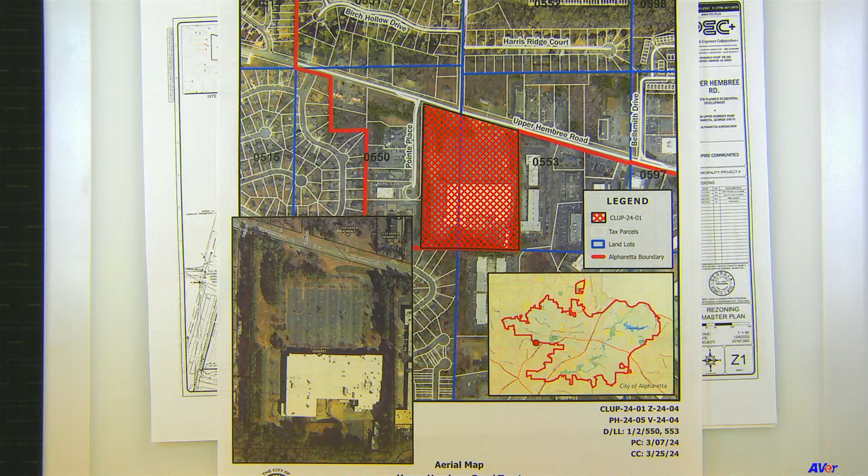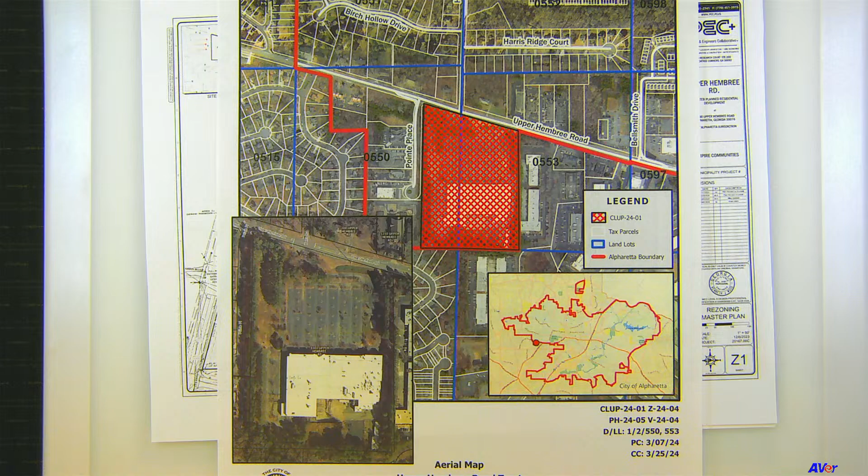Thank you, Chairman and Commissioners. The item before you is a request from Empire Communities. They're requesting a comprehensive land use plan amendment, rezoning and variance to allow for the construction of 149 single-family detached homes on 19.32 acres. The comprehensive land use plan amendment is from commercial to high-density residential, and the rezoning is from PSC, Planned Shopping Center, to R8AD, which is dwelling for sale, attached and detached residential. Variances are requested to reduce undisturbed buffers, to reduce lot width, and to increase building and lot coverage.

I have the location map on the overhead. This property is located at 1180 Upper Hembree Road, just south of the intersection at Upper Hembree Road and Harris Road. The proposed density for this subdivision would be 7.72 dwelling units per acre. This is the former Harry's Farmers Market property. They used that property until about 2014 before it became corporate offices and a distribution center for Whole Foods. The existing building on the property is about 145,000 square feet, with just under 600 surface parking spots.

The applicant is pointing to the geography and the layout as the challenges justifying the requested variance, and states that the lot width reduction is needed to develop a detached product on this property. So I'll briefly go over their variances. There's a variance to reduce the minimum lot width from 50 feet to 31 feet, and to increase the maximum building coverage from 40 to 48%, and the impervious area or lot coverage from 60 to 65%. To justify the lot width variance, the applicant provided an alternative layout showing townhomes developed on this property. Townhomes in this zoning would only require a 30-foot lot width, and they've demonstrated that they could fit 150 or more townhomes on the development. So they're trying to show that they're not trying to increase density, and the variance is actually allowing for a detached product on the property.

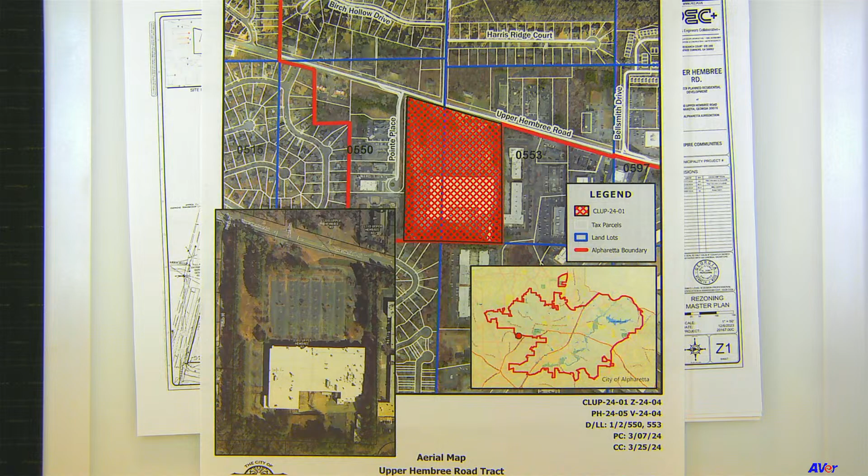As it relates to the impervious coverage variance, the impervious coverage of the property today is nearly 80%, and the applicant is asking for a small increase from 60 to 65%. It will still be well below the impervious coverage of the property today. They are also requesting to reduce the 50-foot undisturbed buffers where the residential property abuts non-residential property. We looked at the surrounding non-residential properties and saw approximately a 30-foot tree buffer on the property to the west, and approximately 50 feet of tree buffer on the property to the south. We have had buffer variances approved for sale residential developments. Typically, the non-residential property is the one that usually provides the undisturbed buffer.

This is the applicant's site plan. This is the existing entrance to the site off of Upper Hembree Road, and they're utilizing the existing entrance at that intersection. There are 149 single-family detached homes proposed. There is a second curb cut over here; this will be a gated curb cut, only for emergency and fire vehicles, and will be gated at all times.

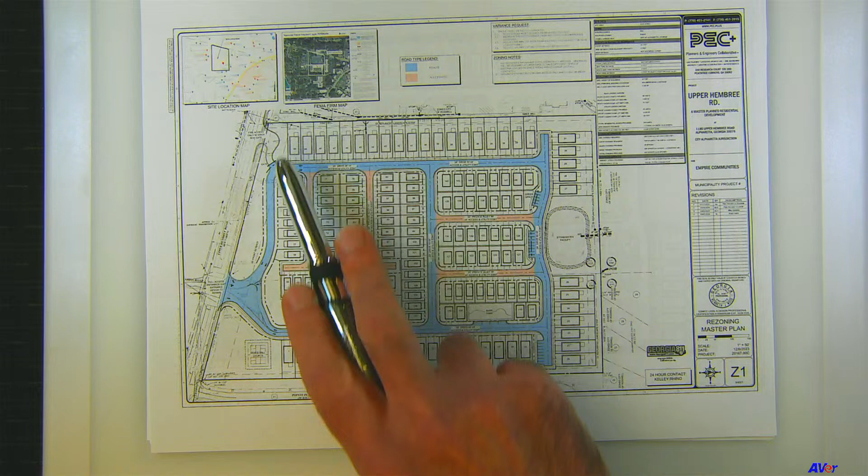The homes around the perimeter of the property are 50 front-loaded homes. The minimum lot size for those homes is about 4,500 square feet, with a minimum lot width of 38 feet. The homes on the interior of the property are 99 rear-loaded homes on smaller lots, with a minimum lot size of 2,000 square feet and a minimum lot width of 31 feet. The homes around the perimeter of the property will be 2-story, and the homes in the interior are 3-story.

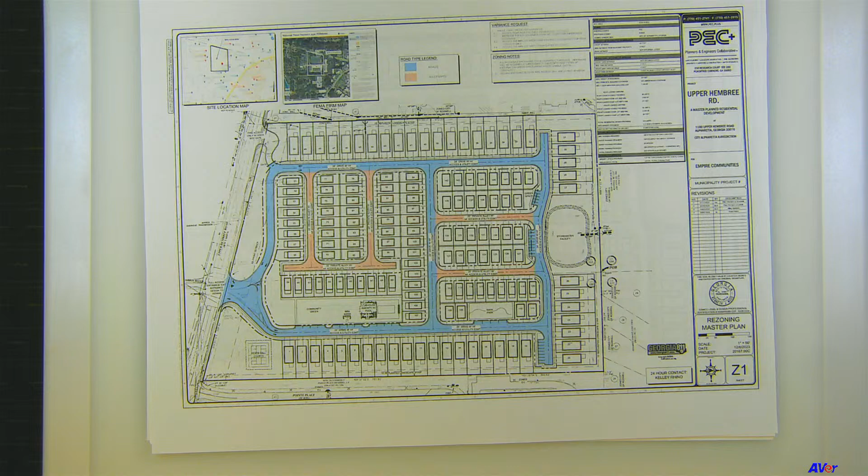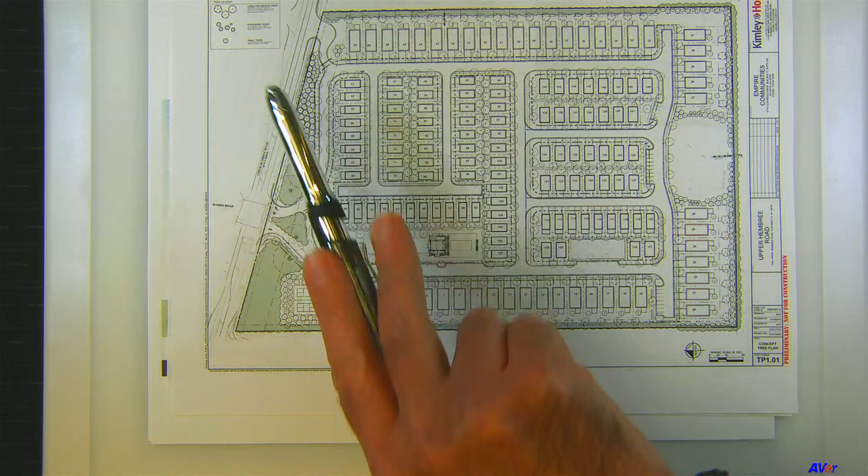Staff encouraged the applicant to provide a buffer. The property has some topography and sits lower than Upper Hembree Road, and right now the property is fairly open in this general area. So instead of a typical 10-foot wide landscape strip along Upper Hembree, we asked them to fill in the areas with buffer material, evergreen material, in order to screen the rooftops from the road.

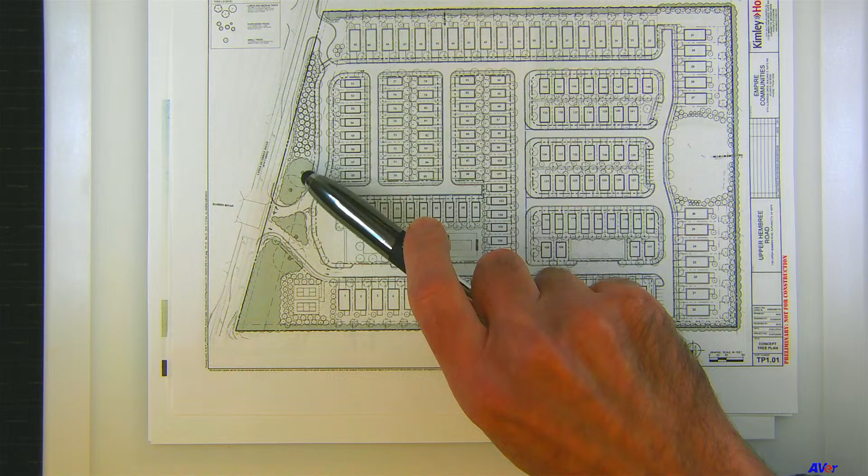So they are showing a buffer in this area, and the rest is saving trees. There's a very nice entrance today with some very nice trees. These clouded areas are where they intend to save trees, and the cloud surrounds the property as well, though not every single tree will necessarily be saved. There's some scrub landscaping grown up over the years around the perimeter that would need removal, but they do propose tree saves around the perimeter and at the front of the property.

Each of the homes will have 2 side-by-side parking spaces in a garage, as well as a code-compliant driveway. There's a total of 596 parking spaces proposed for this development. Code requires 447, so they are overparked. They meet the parking requirement, and there are an additional 38 guest parking spaces throughout the development.

The site plan shows almost 5 acres of community space throughout the development. It includes about 1.5 acres of improved amenity space, including pickleball courts, a dog park, and a community center and pool. There are pedestrian improvements throughout the development, and also linear green spaces proposed throughout.

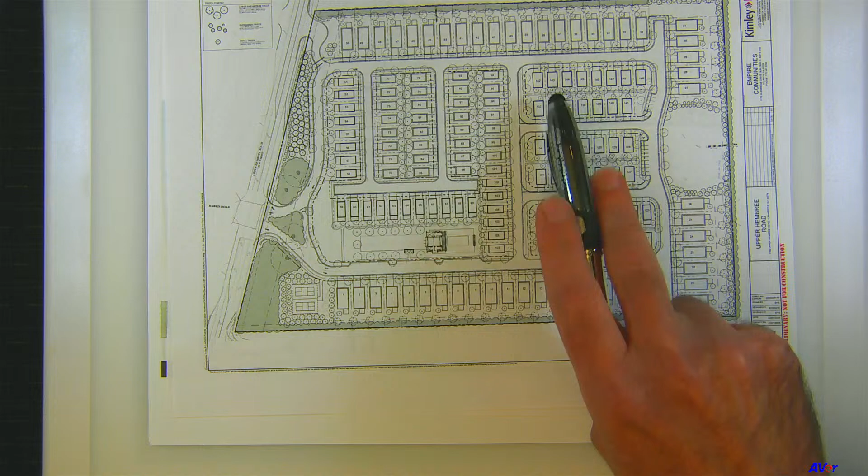These homes are actually facing each other, so they're technically a rear-loaded product, with alleys behind them. Let me go back to the regular site plan. The applicant actually color-coded the site plan: the blue areas indicate streets, and the pink indicates alleys.

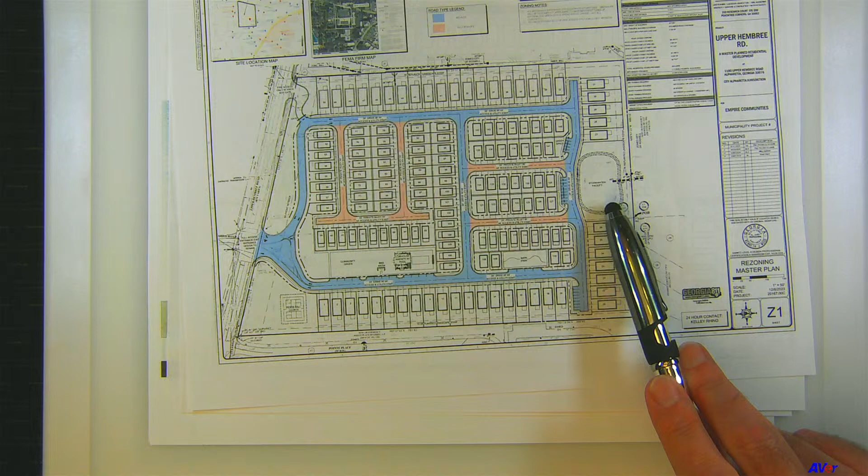Of course, this is a developed site, so there's not a lot of opportunity to save trees except around the perimeter, and that's where the applicant is showing tree saves. They are also looking to reuse and enlarge the existing detention pond. I know there were questions about why, if there's going to be less impervious surface than today, they need to increase the size of the detention pond.

Of course, rules have changed. Stormwater rules have changed over the years, and that probably has something to do with it, but I believe the applicant is ready to provide you some information in that regard.

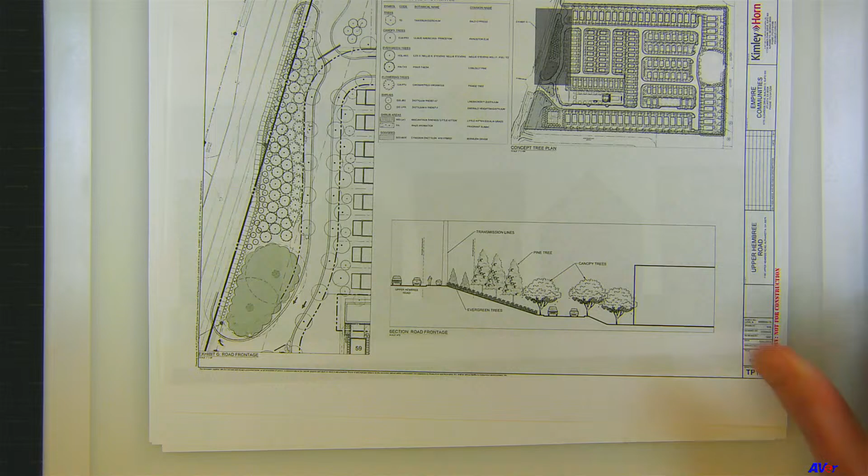This is just a close-in on the buffer along Upper Hembree Road. These are all new plantings here, and these are existing tree saves that they're proposing to save up front. And then these are the applicant's proposed renderings.

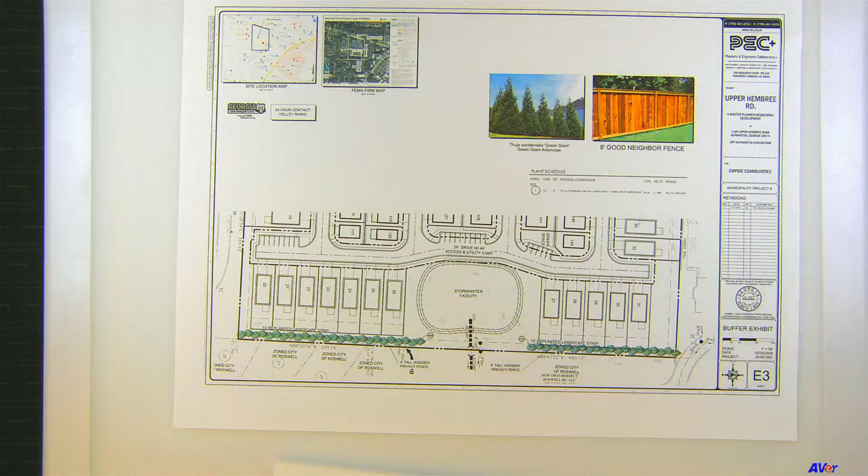Looking at traffic, the applicant provided a trip generation report indicating that the subdivision would generate 119 AM peak hour trips and 149 PM peak hour trips. For comparison, the existing approval on the property for the grocery store, corporate offices, and accessory warehousing and distribution would actually generate 237 AM peak hour trips and 600 PM peak hour trips. So the residential use here generates significantly fewer trips.

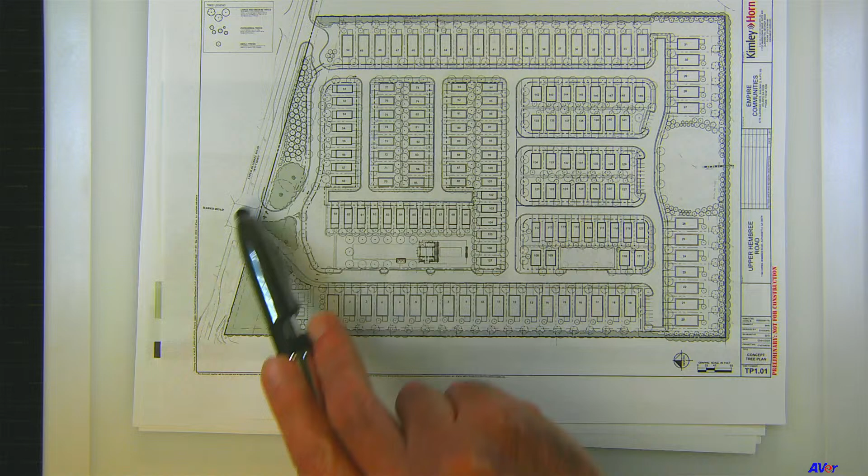The applicant also provided a traffic impact study, which had recommendations for improvements at the site driveway. There are 3 bullets indicated in the report, and we do have a condition indicating that the applicant would need to comply with those recommendations.

Looking at the review criteria for the comprehensive land use plan amendment, rezoning, and variances, we found that given the current state of retail and abundance of available retail commercial space, we really don't need additional land for commercial use. We found that the applicant's proposal is supported by several policies in the comprehensive plan, housing policies, as well as land use policies. As noted, the residential development would generate fewer vehicular trips than the commercial use.

We also noted in the review of the review criteria that the character of Upper Hembree really transitions from medical offices as you move from east to west to more residential feel, and it has a residential, the street has a residential character.

We also found that there are other similar zoning districts used along this corridor or nearby. There is Bell Smith Regency to the east and north. Along Upper Hembree, it has the same zoning district, R8AD. And then there's another detached subdivision just down Harris, at the corner of Harris and Rucker, that also has the same zoning and similar density.

Specific to the variances, we do believe that the applicant's alternative plan with the townhome plan shows that the lot width variance is not adding density, and it's allowing for that detached product. The increase to the building and lot coverage would allow for the smaller cottage home, smaller lot cottage home style that they're proposing within this development.

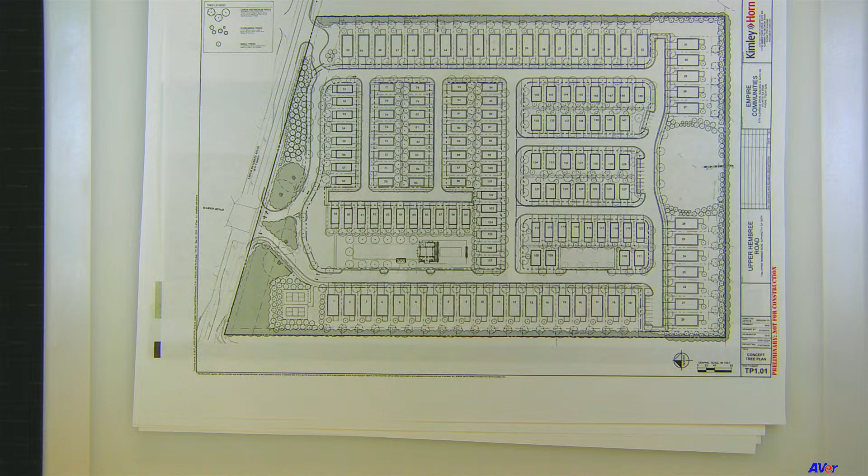The applicant did provide a citizen participation report. They indicated that questions were raised at the community zoning information meeting regarding traffic and impacts to surrounding properties. According to the applicant, they met with some adjacent residential neighbors, I believe the neighbors to the rear of this development, so that would be in Roswell. There is, I believe it's called Hembree Forest subdivision, that abuts the property from here to here.

Based on those meetings, the applicant did make some commitments, and we've captured those in the conditions regarding some fencing and screening along that common property line.

City staff was contacted by a resident in Bell Smith Regency with some concerns over traffic and density, and we did connect that person with the applicant. It's my understanding the applicant has met with Bell Smith Regency. I don't recall if it was the full HOA board, the applicant could clarify that. But according to the applicant, that meeting went well, and there was some email correspondence that was included in your packet.

Then the community zoning information meeting was held on February 14, 2024, and there were no public comments left on the sign-in sheet.

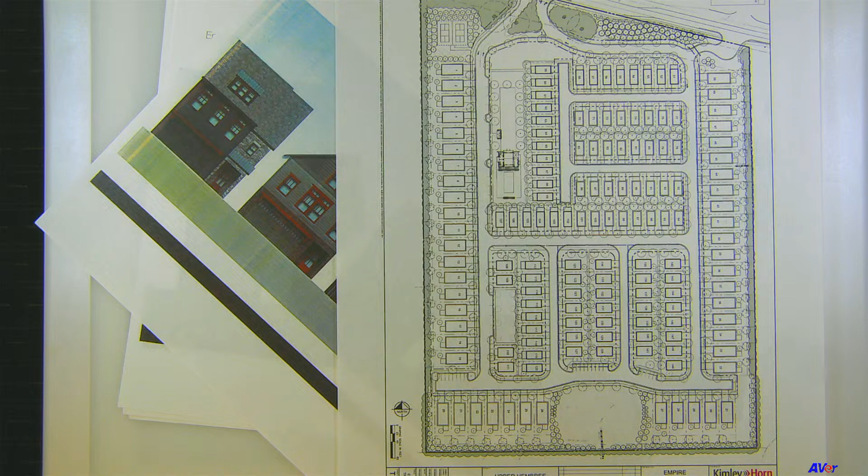With that, staff is recommending approval of the applicant's request, subject to 22 conditions, and I'll quickly go through those. Condition 1 is the site plan specific condition, tying it to the site plan I showed.

Condition 2 is showing the comprehensive land use plan designation as high density residential. 3 is the density. 4 is the minimum lot width per the variance requested. 5 is the maximum building coverage and impervious coverage per the applicant's variance request. Condition 6 ties to the architecture and materials I showed you in the renderings.

Condition 7 requires a landscape buffer along Upper Hembree Road in order to screen rooftops as shown on the plan. Back to the buffer, there were some materials showing loblolly pines, which we feel don't always provide evergreen coverage, so we are recommending those be replaced with cryptomeria, deodar cedar, arbor vitae, and or hollies.

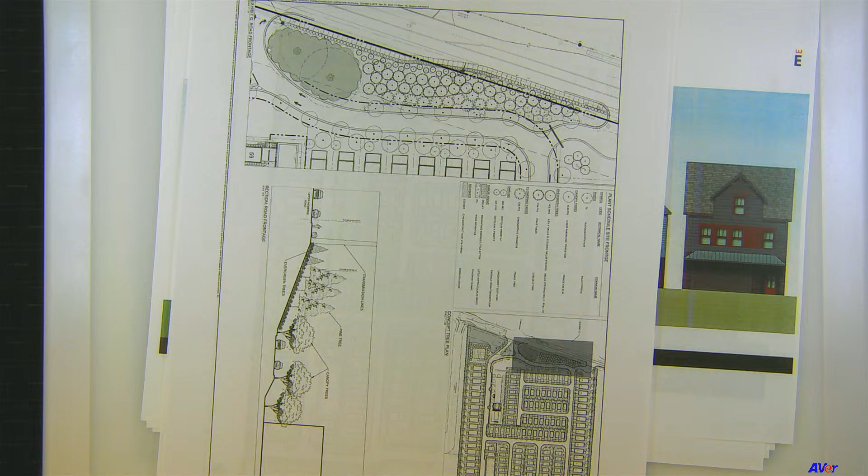Condition 8 is the requirement addressing the applicant's variance request to reduce the buffers around the perimeter of the property. It requires a 15-foot planted buffer. The applicant's site plan is already showing a 15-foot planted buffer around the perimeter of the property, and so we've conditioned that. We also increased the buffer along the east side, and then on the south side to about this point. The property in those locations abuts what we originally thought was just professional office, but they're actually flex office warehouse space with loading bays and doors at the back. So we did beef up the buffer there and ask for a 20-foot planted buffer.

Condition 9 requires that the project entrance be enhanced with landscape beds, a planted median, and a unique monument or sculpture. The sculpture would be subject to final approval by a Cultural Arts Commission.

Condition 10 addresses the open space and ties it to the open space on the site plan. Condition 11: privacy fences and unfinished wood decks shall not be visible from the public right-of-way.

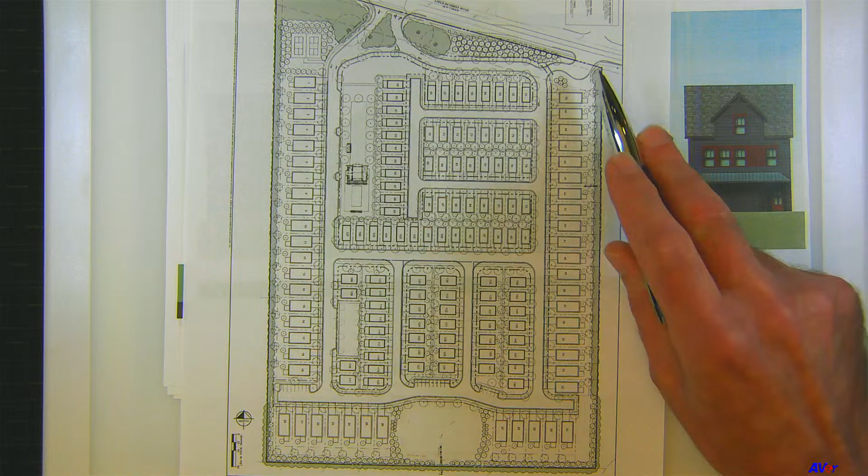Condition 12 ties the curb cut on the far east corner of the property to fire and emergency access only, and requires it to be gated.

Condition 13 addresses the internal streetscape, so the requirements for planters, sidewalks, and pedestrian lighting, and those are maintained. Maintenance responsibility will be with the HOA.

Condition 14 addresses the streetscape along Upper Hembree Road, so there'll be some improvement of planters as well as sidewalk improvements along Upper Hembree Road.

Condition 15 addresses the landscape strips along the new interior roads to this development. Condition 16 requires pedestrian amenities, including sidewalks, lighting, and benches throughout the development and in amenity areas.

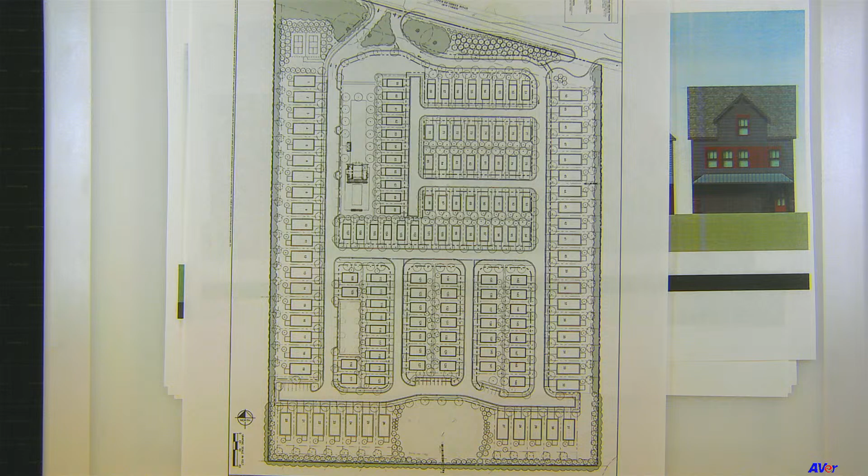Condition 17 ties this tree save shown in the clouded areas. Condition 18 requires the developer to implement the recommendations of the traffic study, so the improvements at this intersection. Condition 19 requires the stormwater facility on the south side of the property to be appropriately screened.

Conditions 20 and 21 deal with agreements that the developer has made with adjacent neighbors. Condition 20 says, per mutual agreement, developer shall retain existing 12-foot tall privacy fence abutting Hembree Forest subdivision during demolition of the existing building on the subject site. So I guess there's a 12-foot fence that is existing here. The neighbor asked that that be maintained while the structure is being demolished.

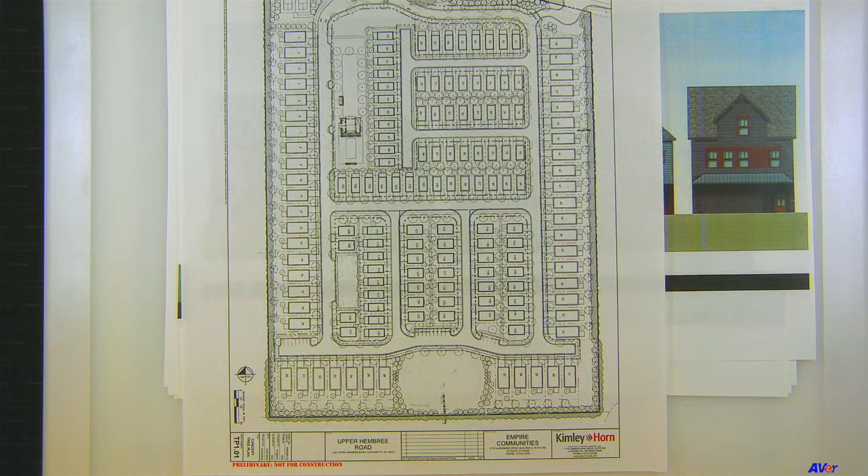Then condition 21 says, per mutual agreement, developer shall install an 8-foot tall wooden privacy fence on applicant's property, where adjoining the southern property line, as shown on the buffer exhibit - referencing this exhibit prepared by the applicant. Applicant shall install a staggered double row of evergreen trees on applicant's property adjoining the privacy fence.

Condition number 22 limits the number of homes that can be rented to no more than 10%. If you have any questions, I'd be happy to answer those.

Thank you, Michael. There are comments we received late from the applicant, numbers 8, 14, 15, and 17. I assume you have taken a look at them. Yes. Do you have an opinion about the applicant's revisions to the conditions? Yes.

Staff is supportive of the applicant's requested changes to conditions number 14 and 15. We have not come to terms on their changes to conditions 8 and 17. Our preference is, if the board recommends approval of this item this evening, that conditions 8 and 17 stay as staff has recommended. I believe the applicant should be able to do some additional work - they need to look at some grading before they can agree to the language proposed by staff, but I think they could get there.

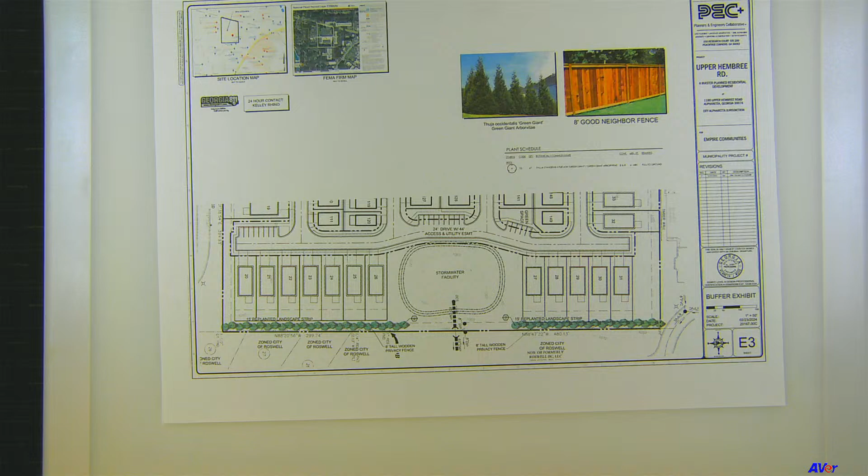Also, when I look at condition 13 and then at condition 16, both of which discuss pedestrian sidewalks - condition 13 says sidewalks are not required in the alleys. Correct. So if I look at the layout - could you put that up there - the interior lots that are accessible only from the alleys? Right. But you're saying they face each other. But what is the pedestrian access to these properties?

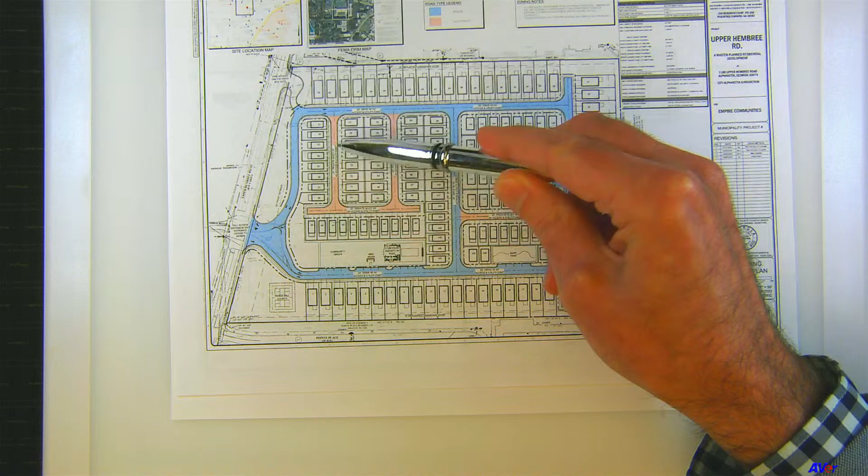So, for example, this pink represents an alley. This is the rear of the home, facing the garage will be here. And the front sidewalks of the home are facing this green space, and there's a sidewalk down the center. Oh, that's what that's indicating. Yes. I thought that was just a property line. Okay, and that's the condition everywhere the homes are facing each other. Got it - there's a green space with a center sidewalk. Okay, thank you, Michael.

One last question, I'm sorry - on condition 21, I see reference to an 8-foot tall wooden privacy fence. Does that not require a variance? Typically, we limit residential developments to no more than six feet. In this case, there's an existing 12-foot fence, so they're not increasing the nonconformity that exists today. This is part of an agreement to address some concerns from the neighbors to the back, so I don't think we would require a variance in that case. Thank you.

If you can go back to the lot use, what is to the south?

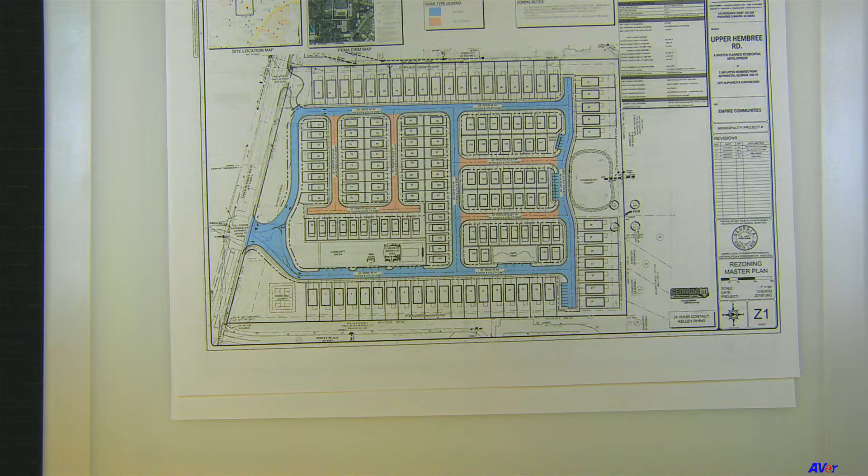Sorry, the south, and the north, and the east of the property. What type uses are there?

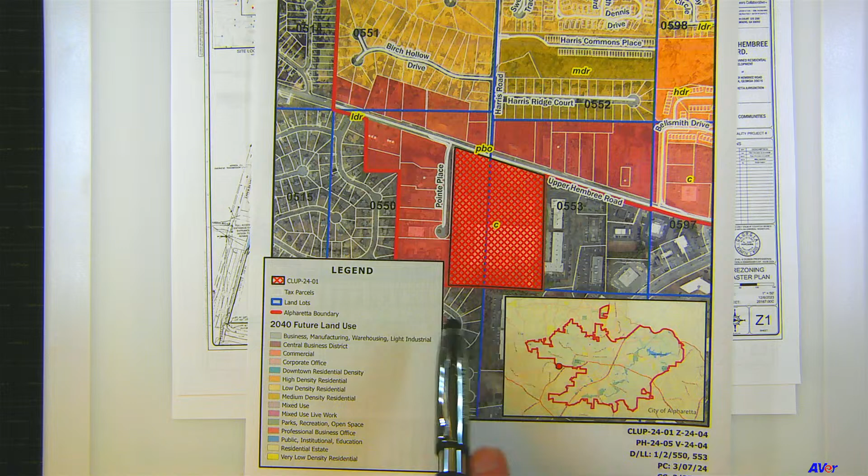This would be a good map, Chairman, to look at. The property to the south and east is City of Roswell. This portion of the property abuts a residential subdivision in City of Roswell, Hembree Forest. This here, as well as here on the south and east, those are flex office warehouse space. The properties across Upper Hembree from the development represent some professional office. Spirit of God Church was approved on this property, but I don't believe they've developed yet. This is a residential property, an R15 property right here.

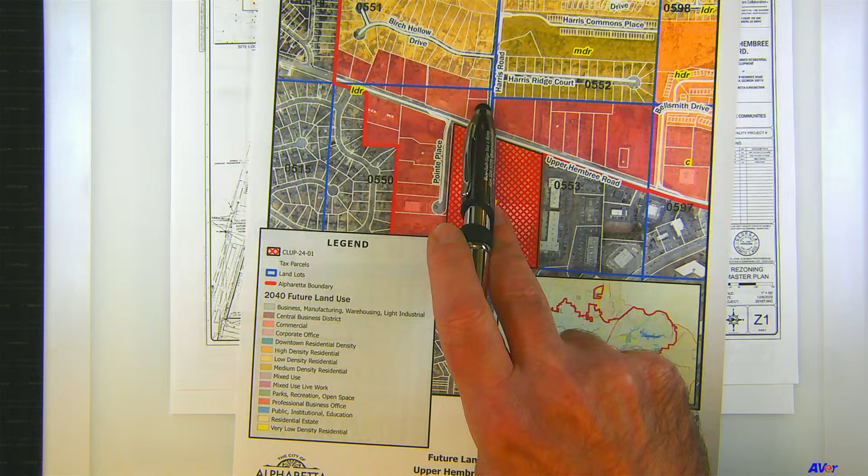And then the property over to the west of this development, most of it is separated by a public street, Pointe Place. These are a mix of professional and medical offices, and on the other side is residential. So there is no residential between the property all the way to the junction between Hembree and Main Street. I'm looking at the area that I have in front of me.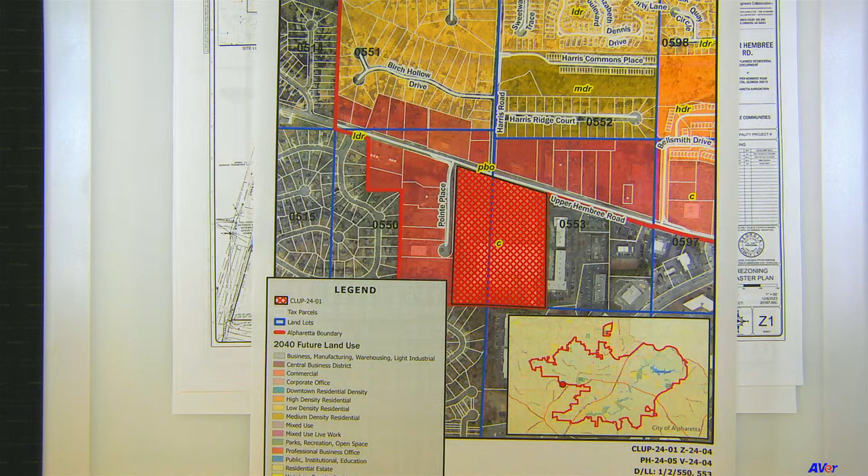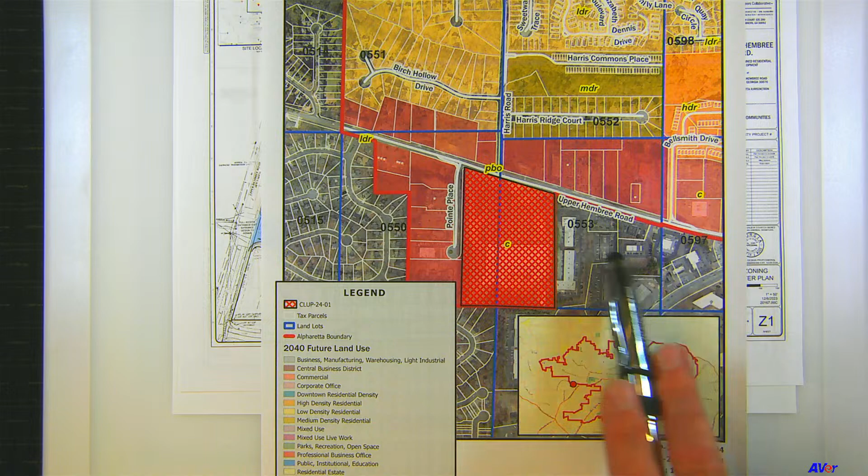Did you hear the question? No residential between the property and the junction between Main Street, or Roswell Road, and Hembree. I'm not aware, I believe this is all non-residential development all the way to Alpharetta Highway in Roswell. I'm not intimately familiar with these properties because they are in Roswell, but I'm fairly certain that these are all non-residential properties here.

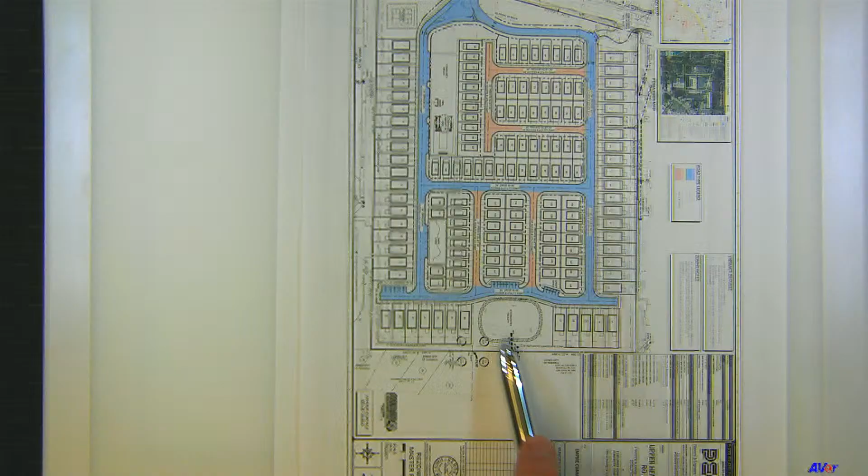I had a question about the stormwater drainage. Did you see that that is being enlarged now? Yes, so the applicant, there's an existing detention pond here at the rear of the existing building, and they are proposing to enlarge the size of that detention pond.

Any further questions? All right, we're going to turn this over to the applicant to make a presentation.

Yes, we can. Is this good? Awesome. Kenneth Wood, 350 Research Court, Peachtree Corners, Georgia. So we're excited about the project tonight, and it's always hard to follow Michael and Kathy because they're the best in the business at explaining everything. So we want to run through the different things that we're seeing, so you can understand our approach and how we came about looking at this.

So starting with the aerial, you can see it's a really unique site. As he mentioned, Whole Foods went out in 2017, and before that was 2014 when Harry's, and it's been sitting there. Seems like at random times I've driven by it, and you basically have kind of that visual on the front. As we walk through a lot of the planning that we've done, when you drive by that site, you'll notice it has a lot of really nice, basically pines along that frontage, and then it kind of gets sparse along some steep areas. We're really going to talk about that and what we've done to try to preserve that, and it's one of the ways that we approach the plan as it is.

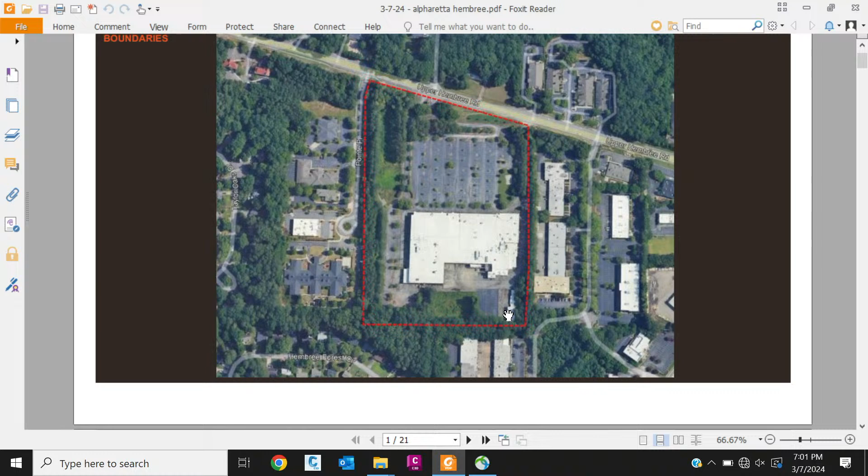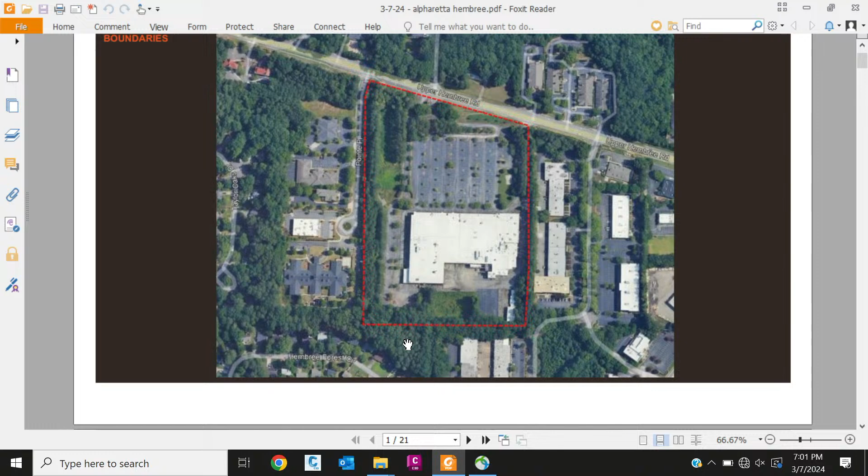You can also see the surrounding areas. To kind of just recap, we were actually able to meet with one of the neighbors here, Jeannie, she's here tonight, and actually stand in the yard. So we were able to get a really good perspective of not only inside the site of how it feels, but also externally, and then what we should do as part of our conditions that we're looking at here.

This is the survey that we had done, and this really kind of shows you guys in terms of the impervious area. So the parking lot alone, the 595 spaces, is basically 5.25 acres of the site that it makes up, and then you have the building. So obviously there's a lot of demolition that would have to be done as part of this.

So when you're seeing some of the conditions, like that condition about the 12-foot fence remaining through demolition, that's for the protection of those homes behind. And we were able to see that, and we're able to see through the fence so we could understand how that made sense.

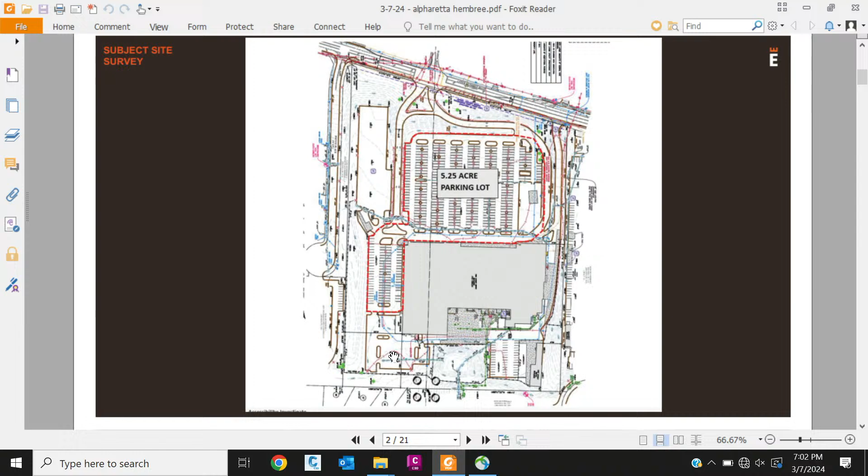Are you able to see the little hand? Okay, perfect. On the screen, you can actually see it in this area, and these are where the residents were down here coming on. And this is just a bigger version of what you're seeing here with Hembree in this location.

This is our master site plan that you guys are looking at, and what we tried to do is really try to use some different colors to show that there's not just one type of product on here, or even just two types of products. We have alley-fed product as to where we're really fronting on a green space, and Empire does a really amazing job at really creating community and really embracing the green spaces.

If you guys have ever been over to the Thompson community that they did over there, they basically have a lot of green space that you can feel, and they make it very walkable. That's why we try to turn all these areas inward so that we have essentially this sense of arrival when you're home in the community.

When you come in, basically the frontage, what we wanted to do was really try to leave those trees. So when you're looking at the site, this entire group of trees here, we left alone. And the way we're able to do that is we gave the road a little bit of a diet—it's basically a 2-lane, larger, more industrial feeling road. So we gave it a lane diet here down to more of a one-way, making sure the fire department can get in there.

But we wanted to leave this island—there's also trees inside the island, and trees on this side. It also worked out really well because these are pickleball courts that sit in the corner, and we have different amenities. I'll walk through the plan and show you, but what that does is set those amenities down below the road. And with us leaving this entrance, it basically dives down, so once you're down here in front of the homes, you're set below Hembree. It's really nice—it actually creates a bit of a noise buffer. That's why those trees in the front and leaving this front road in place really took advantage of what's there today and reuses it for what we're looking at in the future.

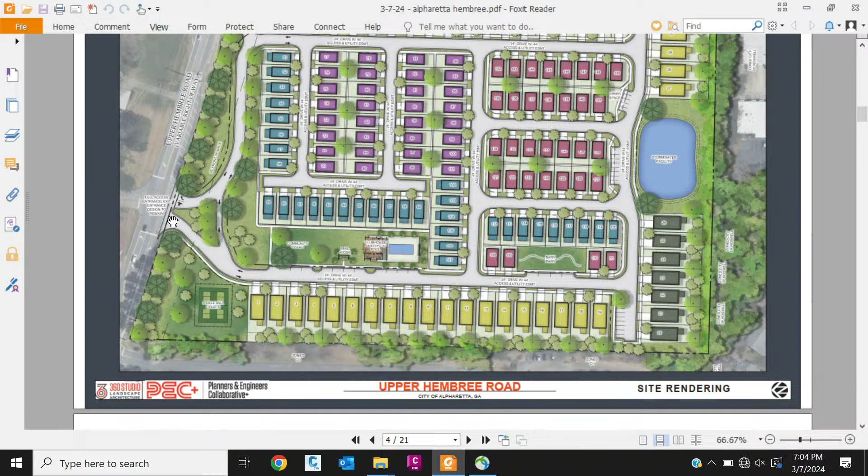As you come down, like I mentioned, the colors—there are 5 different types of products here. You have a front load product, 2 different types of those, and on the rear loaded product, 2 different types as well—actually I think 3 of those facing the amenity here, and then in the small alleys and back here as well. The guest parking, we put in some different strategic places.

We really wanted this street to feel like a main street, so that's all on-street parallel parking with tree bulbs that pop out. We've had a lot of talks with the arborist, David, going through exactly how those feel and what we can accomplish from this. We've done a lot of our homework with Fulton County and the arborist, making sure we can fit the landscaping as well as the utilities we need. I've got some slides to walk through how that works for you guys.

But as you come further into the community, this would be a dog park that we're looking at having centralized here, and then all through here would be green space.

I know there was a question, so I wanted to, while we have it up on the screen, go over the stormwater management. The stormwater pond—it's not that we're wanting to make it larger. With the new runoff reduction and new stormwater standards coming up, we'll have smaller green infrastructure areas throughout the community. But when it comes to the pond, even if it's almost all impervious today, we have to look at it as if it's essentially a wooded site. So when we run the calculations, we have to take it back to more of a pre-developed site. We know with current standards that pond is going to get larger because it was developed at a time when those standards weren't as high. That's the reason, but we're going to do a really good job with landscaping and fencing to make sure it's not something that just sits in a hole—we can landscape around it and make it feel purposeful.

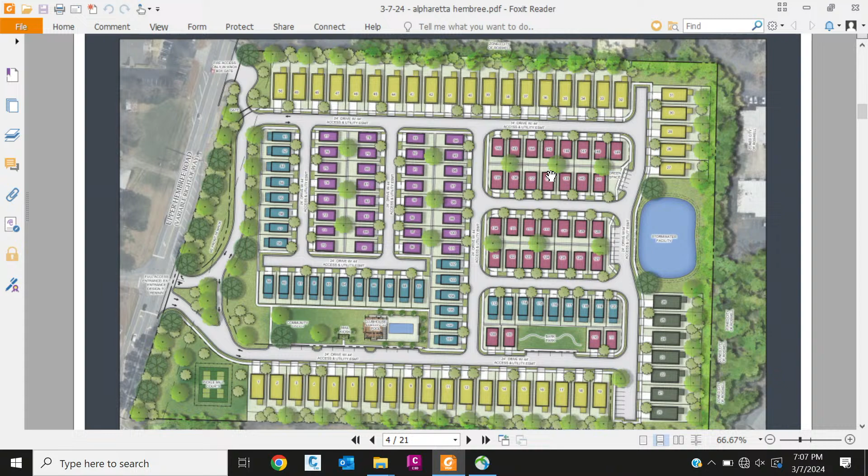Now, when you're here, this road, we kept existing with these trees, but we wanted to make sure this row was facing outward, so this has those great front porches overlooking the amenity and this green. Then we started the alleys going back through the project, and that's how we designed it from the inside of what the site was giving us back to the outside.

It's a little hard to see, but each one of these alleys actually has that sidewalk and plantings, and we really want to embrace those zones because those are a really wide landscape area, so we're making sure particular attention is paid to that so you can really see it.

Michael showed you this slide as well. Just to go back over this, everything here, these are our primary roads, and here we looked at those more. They're roads wide enough for the fire department, but they act as alleys. We wanted to make sure everybody understood we're providing sidewalks through all the places that made sense. We just didn't want to have them on the backside where there wasn't door access coming through.

Working with Eric, with Kimley, we were able to produce some really cool plans to demonstrate the landscaping. We had several meetings with David going back and forth about needing to get in the overstory, shrubs, and a lot of the different types of trees required per lot as well as along the street. We were able to do that, working with him to spread some things apart and look at things by lot basis.

And you can kind of see this landscaping up on the front. So what we did is we really were trying to go for a uniform look.

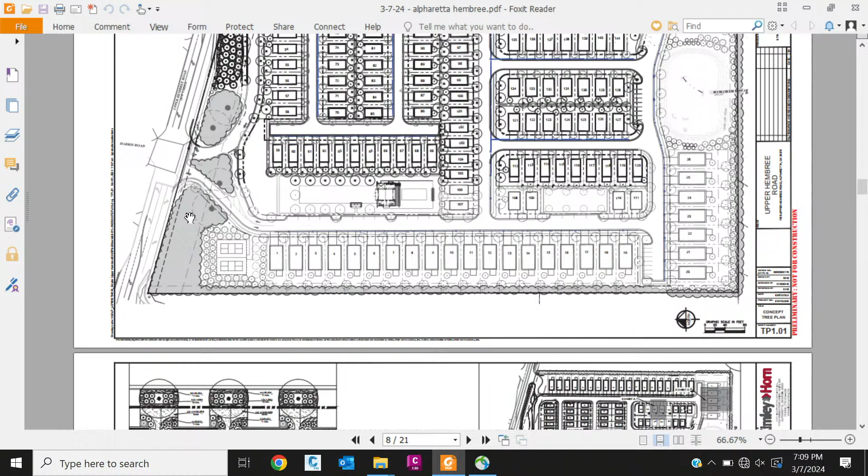We're able to demonstrate that with our saved trees here as well as all the new plantings along here. And then these are some blow-ups we created so you guys can get a feel for how this looks - all the different types of larger trees through here as well as all the different types of shrubs and smaller plantings that would go on within a lot.

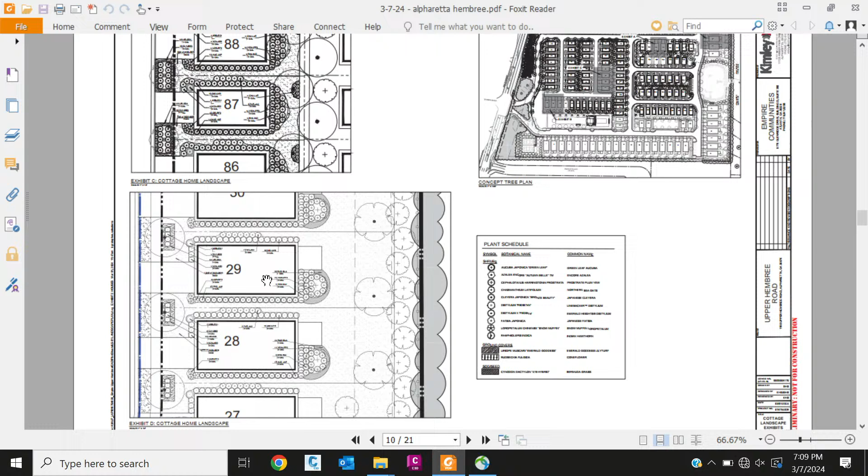We wanted to put a few of these in here because they were part of our submittal package, but it wasn't just to demonstrate we're going to really jazz up the landscaping, which we will. This is an alley lot and this is a front load lot. They're part of proving that even with the roads, the way we've designed them, even with the lots, we can actually still meet the ordinance on a single family lot with the arborist, with the overstory and smaller trees.

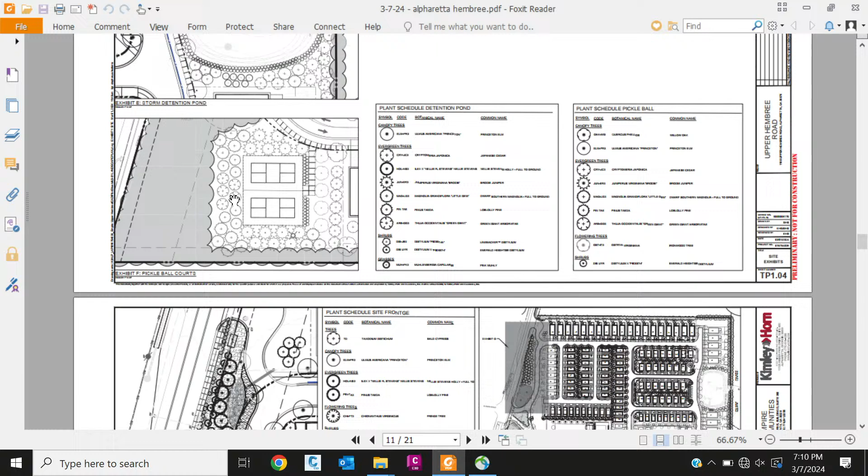We also have really good screening around the pickleball, and the reason we have the pickleball further up is we have that road and the office, professional office beside us, and it's up near the road. It's totally screened, but that would keep the pickleball from being back by the residences in the south part of the site, because pickleball is not the quietest game in town. It's really fun, but it's not the quietest, so we wanted to make sure we were thinking about that as well.

This shows the graphic of what I was talking about - preserving those trees, coming down, and then really sitting below the road.

Just to throw a little bit of color to this, when we met with Jeannie, it was her house, this one here. So that existing fence was right along here, and that's the one we are preserving today. What we're looking at doing is running that 8-foot fence down to here, picking it up from here all the way down, and having the screening with evergreen screening, because we realized when we were there that is something we want to be able to provide.

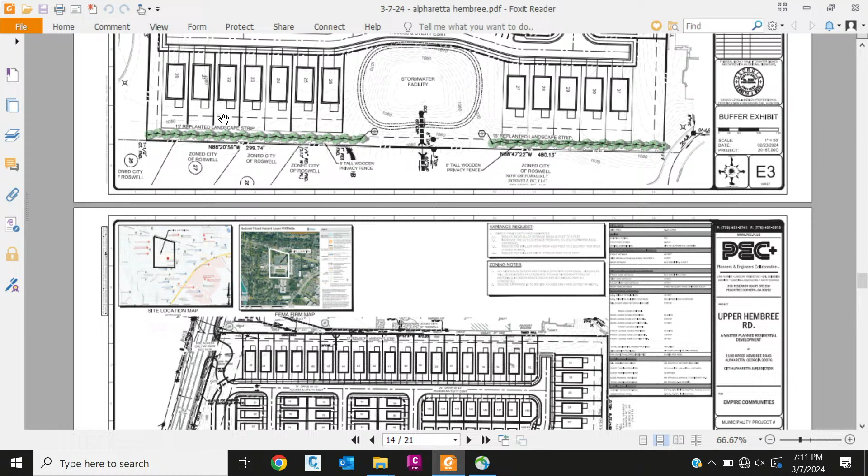These homes, when you're looking at the site plan, this is the only place where we abut the residential, these homes. We pushed them, those are the furthest away from the residential portion of that.

This is our final zoning plan. I showed it just a little bit earlier, getting it together. And then this is probably the thing that really embraces what we're trying to do.

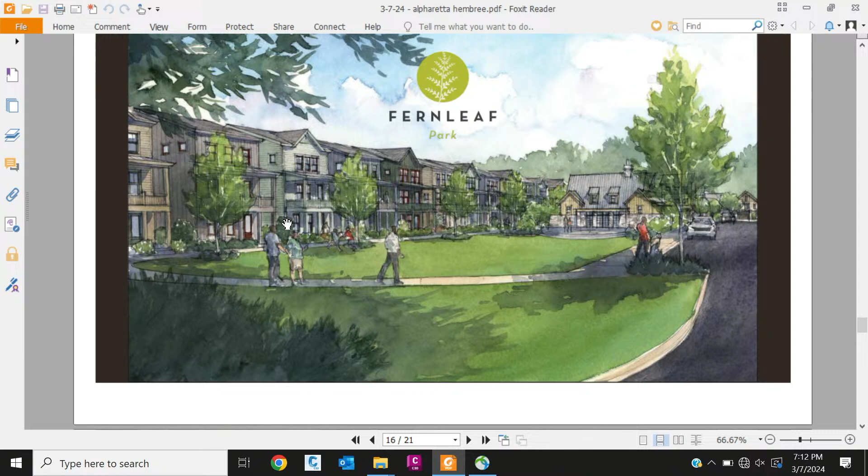These are kind of zoomed-in views. This is that amenity area up front, so you can see you have your front porches so people could be out on the front porch overlooking the amenity, or kids playing outside overlooking the amenity as well.

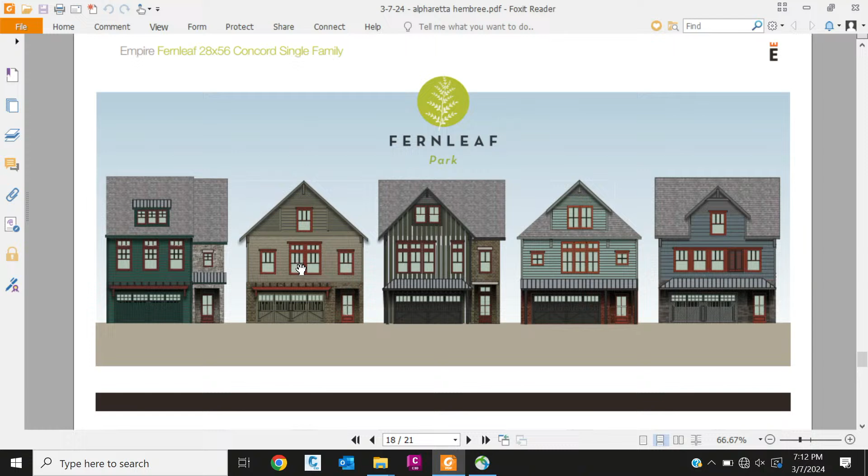Architecturally, what you'll see is they have a project over on Thompson, which is more of a lighter palette, more of a white, light gray. This is looking at a little bit of the darker colors. We think it'll be a really good feel for this portion of the community, and a little bit different than what you see on so many of them.

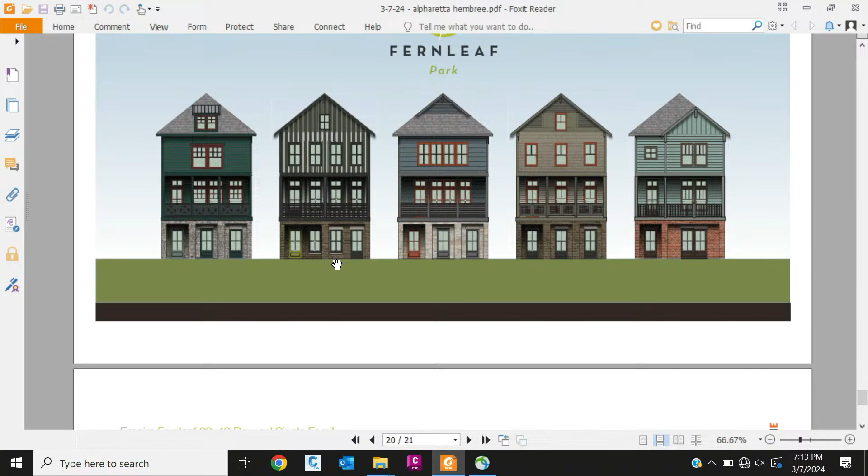These are just different elevations for the front load and then the rear load overlooking that amenity area you have through there. And then finally, these are the ones that would be facing Upper Hembree in those locations. With that, I can take any questions you guys may have and answer anything that I can go over.

Thank you for your presentation. You were very comprehensive in your presentation.

Any questions? Yes, I actually do have one on number 18. I could not find it, and I just might have missed it - the recommendations for the traffic impact study. Michael mentioned there were three items. Don't have to go in depth, I just didn't know what they were. I couldn't find it, sorry if that's a hard one.

Oh, it's on page 5. Okay, thank you, it is. Do you see it? I will find it, thank you. It might be in your staff report, okay. And then the second question I do have, I'll look at that, he said page 5.

The second question I have is involving, it was referenced on the drawing as pond, and there was also reference to stormwater retention area. So the goal, it's heavily landscaped based on your renderings. So it's not an amenity as far as walking around or anything like that. It is truly out of sight, out of mind.

Screening, yeah, it is a stormwater pond, and there's no spring or anything to keep it full. So the way we looked at it was really good landscaping, but also fencing. Since it's already part of kind of commercial industrial, it sits in the back, kind of out of the way. If it was something where it would have been easier to have a trail that comes over and wraps around, which we've done on some different projects, but this one in particular, it made more sense to screen it and try to make something so it wasn't impacted. Okay, thank you.

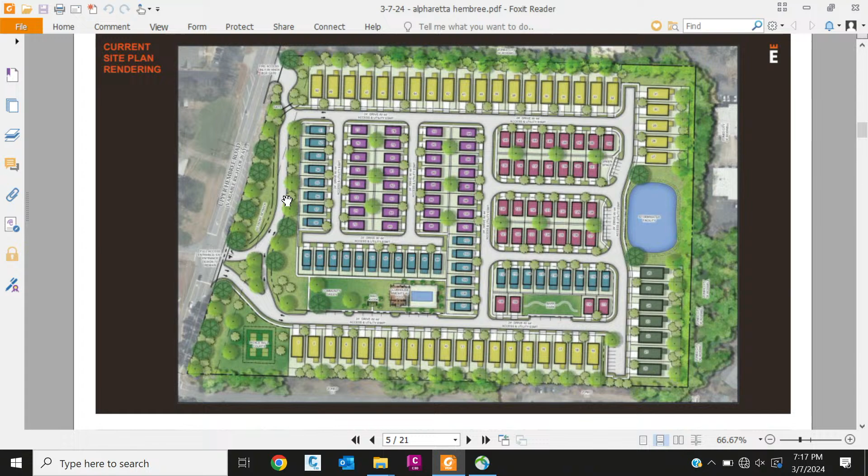If we feel like the distribution is really good all through here, if there was one location over here, they may not have as easy of access. You could probably fit some parallel parking out in front of these here. But we felt like the way we had the plan was sufficient, but we can definitely look at that if that's a concern. Okay, thank you.

I had a question for you, and that is, what is the current pervious versus impervious, and what you're going to have for the pervious versus impervious on this project? Sure, it's closer to like 90 down to the low 60s - 64.2. I think we requested 65.

Is that because of - now there's that 5.25 acres of asphalt and then the building. So you're keeping the pervious impervious about the same, or going from the upper 80s down to closer to 65 or below? Yes. So it's lowering quite a bit on it. Yeah.

It's when you go out there, you can really feel it. They do have some landscape islands, but that's about it. There's just so many random concrete pads, I guess, for different things they were using. But we're definitely reducing a lot.

Any other questions? No further questions at this time. We're going to ask the public if any comments. All in favor, please come forward.

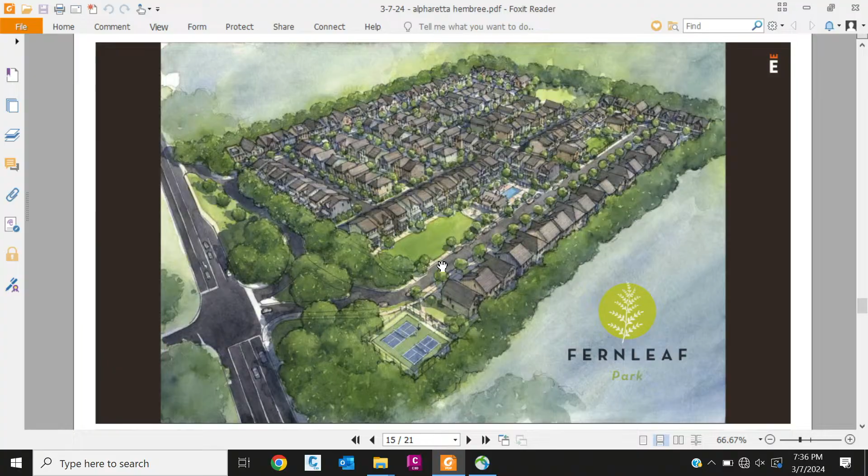Jeannie's concerns are our concerns. The biggest thing with the demolition, the ugly part of the development, is we immediately said let's keep that giant fence that's there, about 12 or maybe 13 feet tall. As part of what we're looking at doing, she has Kevin's cell phone, and Kevin will be managing that construction part of it. We want to do the right thing as well. We realize it's not the funnest thing to have to do, so hopefully being able to acknowledge when it's going to happen, leaving that fence up will provide major screening coming in. One answer I probably need either Michael or Kathy to help me with is I don't know the time.

Construction activity is limited Monday through Friday, 7 a.m. to 7 p.m., Saturday 9 a.m. to 5 p.m., and no construction or demolition activity on Sundays.

What is the schedule for construction, when do you start, when do you finish approximately? Kevin Norton with Empire Communities: currently we're scheduled to close on the property by the end of the year. Demolition would start early 2025. Horizontal development should take most of the year in 2025, and we'd start going vertical in '26. We expect our first home closing to be probably the middle of 2026, and that'll take us probably through 2029 based on our current pace.

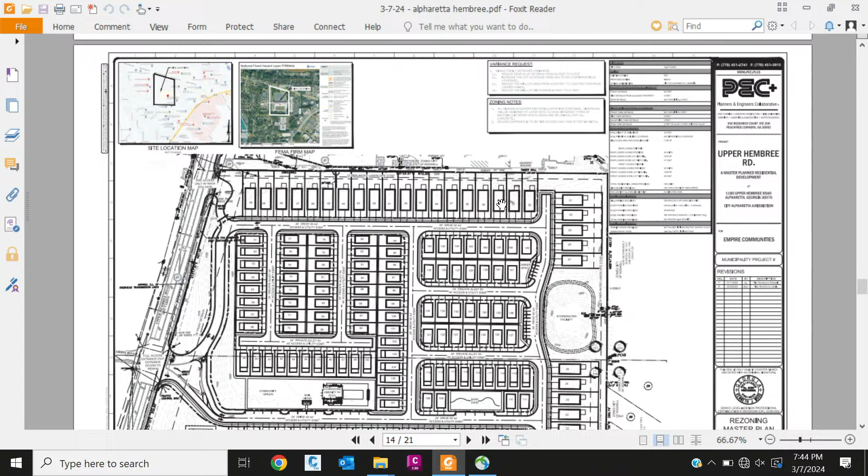Sure, for the front-loaded, just square feet, approximate's fine? Overall, the smallest unit you have is 1,800, and it goes up to 2,600 on the property, and we're going to be in that 6s and 7s. There are 5 types of product here. Yes, and it'll be really, really nice product inside and out.

And the price point, I think I saw that, 600 and 700s, that's the smallest one, is 600. It is, and we're really trying to get that down. Alpharetta's gotten really expensive, so this is a very competitive way to be able to have that good price. Material costs have gone up, so has labor.

All right, any other questions? Mr. Chairman, a quick comment. I believe I read that all of the interior streets are going to be private and therefore maintained and operated by the community's HOA. That's correct. I'd say then that public safety would have no jurisdiction for managing any on-street parking that may happen. I don't know if you're going to have any fire lanes designated along any of the internal streets. So that would put it on your HOA to establish a covenant about on-street parking and also to enforce it, which can be cumbersome. So that's just a note for your planning going forward.

Also, I am not certain, and I don't know if staff knows the answer, whether there's any code requirements for the height of a fence if you're going to have an off-leash dog area. Might want to check into that. I think that was going to be important, but I don't know if y'all have that in. I think that's easily cleared.